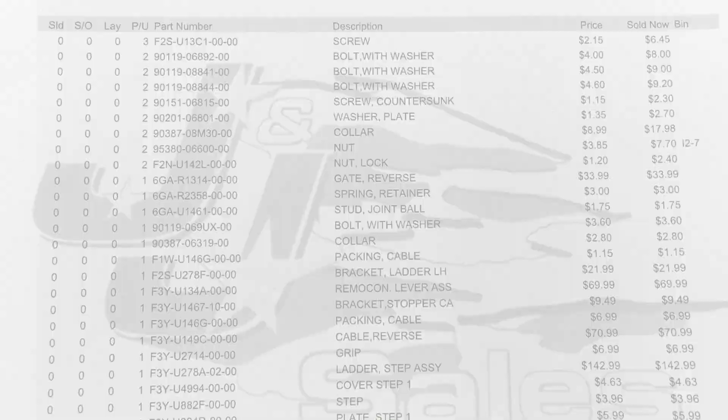Here's the list of parts I have here. There's also some parts to install the OEM rear step in this list, and those alone add up to almost $200. So you're looking at around $250 to $275 in reverse kit parts, depending on what your local dealer charges.

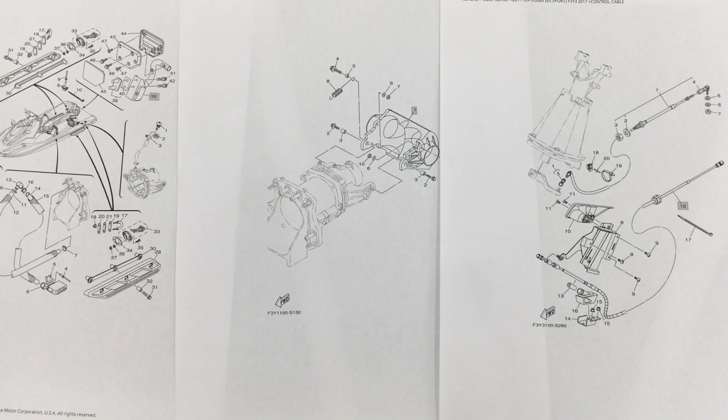The dealer also supplied these diagrams. I'll put a link for these in the description as well. This one's for the rear step. The two on the right are for reverse.

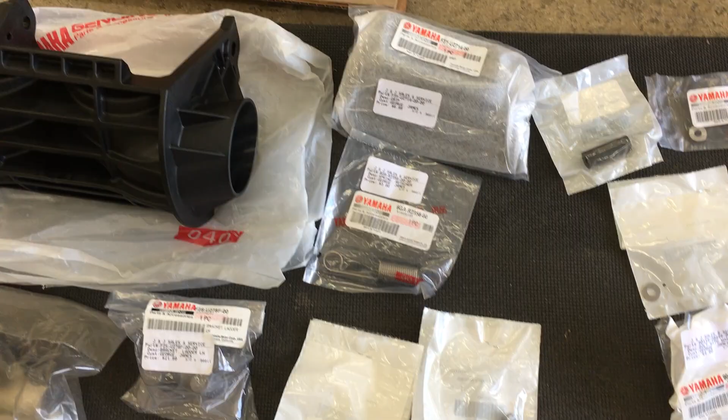Here's all the parts needed for the manual reverse installation. I'll go over each of these in detail as I put them on. A lot of little pieces and parts. There's the handle, the actual lever, bucket, and the cable.

Getting this sorted took a little while. The letter next to the part number says what diagram it's from. B for bucket, C for cable, and L for ladder, which we'll do in another video. Then the number beside the description corresponds to the number in the diagrams.

First I had to remove the seat, storage compartments, side panels, and the whole black plastic section on top of the hull to get better access to everything.

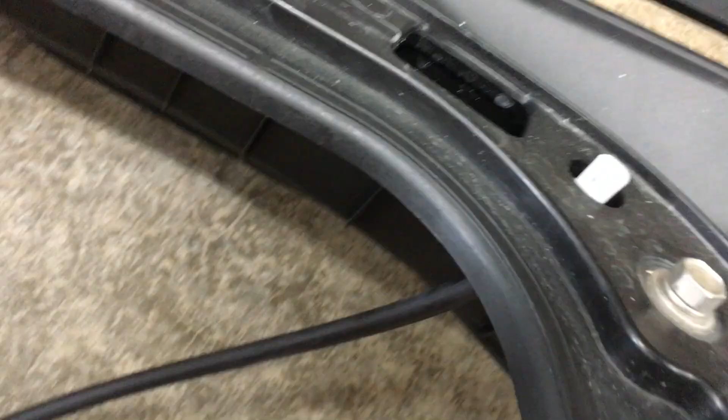On the black plastic top piece, there's this rubber hose just dangling around in the hull. This end was supposed to go down to the battery box. There's a diagram showing how it should go. I need to remove this bolt too.

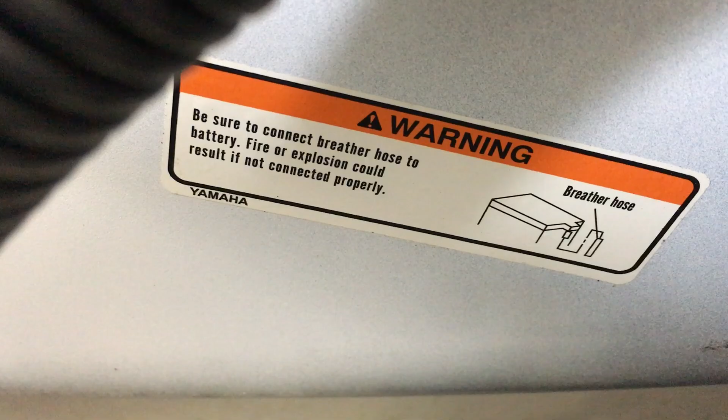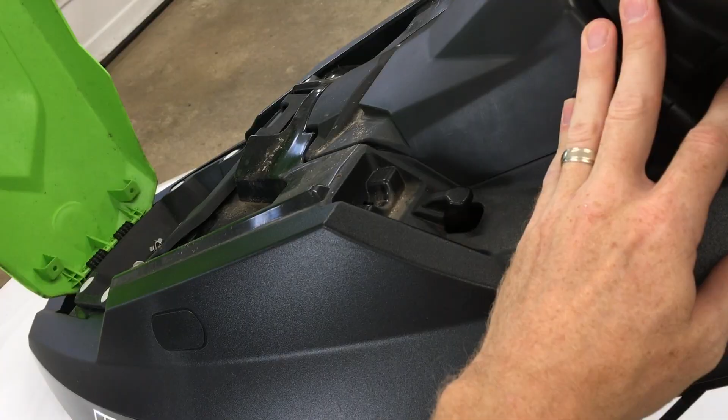This trim cover needs to come off, but if you just try to pry it straight up, there's a white plastic clip that's probably going to break. So I need to remove some more stuff to slide the entire cover up.

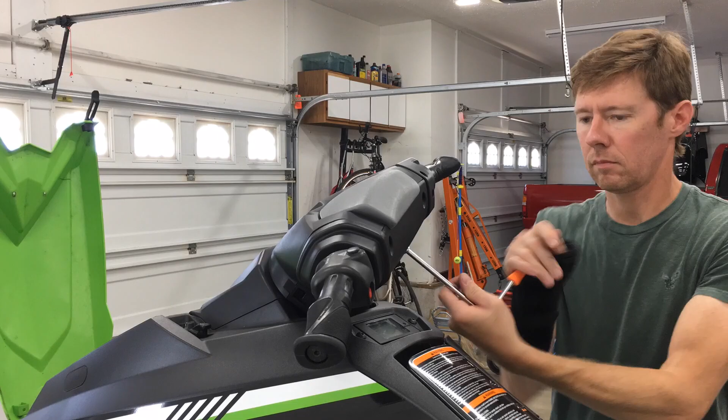Next I removed the Allen head bolts from the back of the handlebar cover. They were a combo of 4mm and 5mm. Now I can press in this clip and the top cover will pop right off.

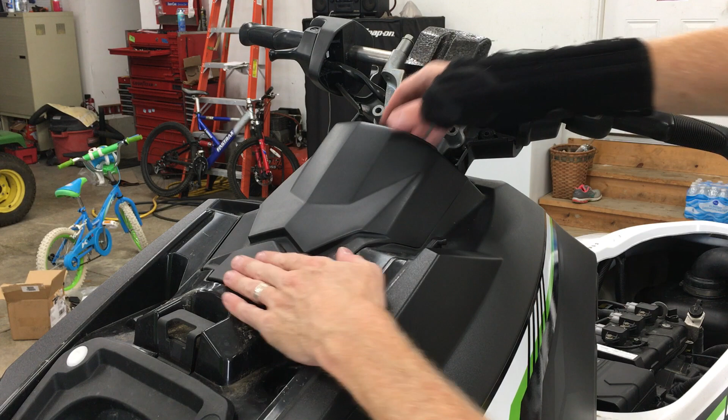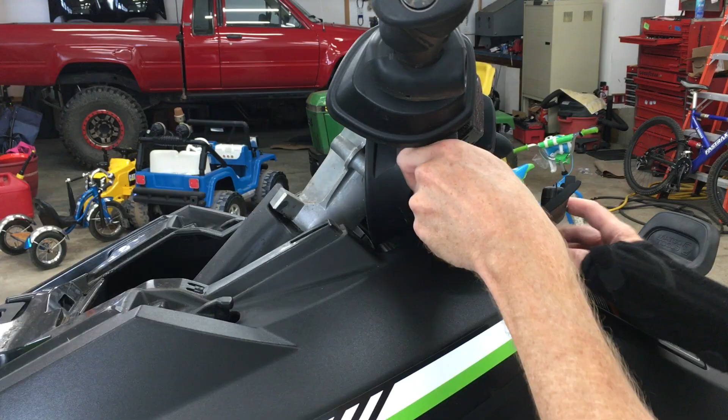With that out of the way, I can slide this trim cover up and it comes right off. It's held on with these two clips up here and that white plastic clip at the bottom. I can bend the lower bar cover a little to remove it.

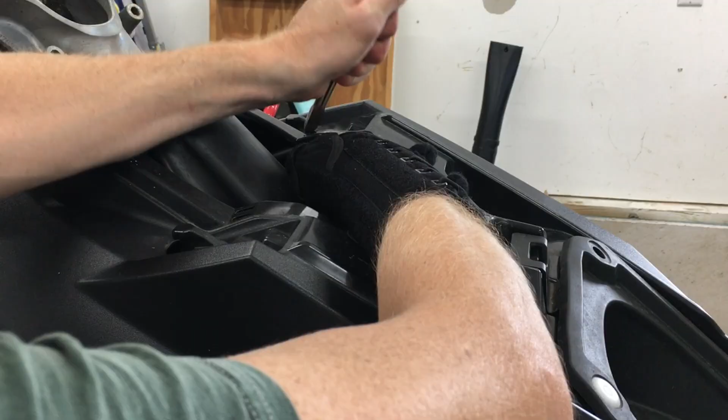Now this black cover can move. Everything I've done so far is just to get some room to move this black cover up. Now there's a wire harness keeping it down. I'll just cut the zip tie holding the wire for now.

Now grab something. A life jacket works great. And I'll use it to hold up the cover, and pull it out and away from the hull. Now I have room to work.

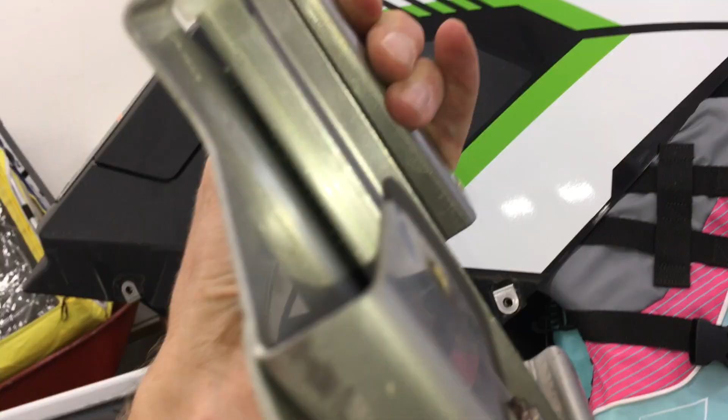Looking back in here, the holes for the metal lever bracket are already there. There's two, there's the third. Here's the metal bracket. 1, 2, and on the back, 3.

And these two holes at the top, they attach to the plastic handle, which will replace this block-off cover.

To remove that block-off plate, I have to unbolt these two Allen head screws from the bottom, and they're 4mm. I used a long extension on a 1/4-inch ratchet to get to the screws, and this is all it is.

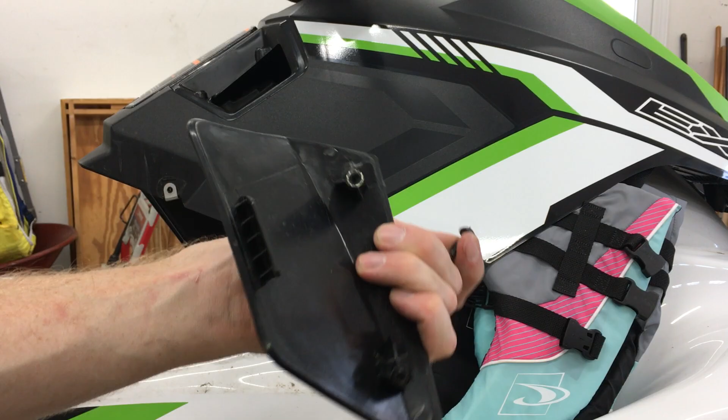Okay, just ran into an issue. These 3 number 9 screws are supposed to fit the metal bracket. There's the part number right at the top there. Here's that part. It's a screw, not a bolt. Not gonna work. These must be for the step.

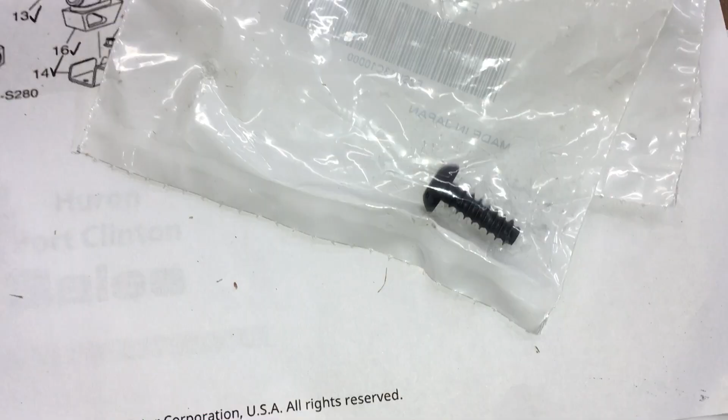I've got some of these metric M6 by 1.0 bolts. They're from one of my Toyotas, and they fit perfect.

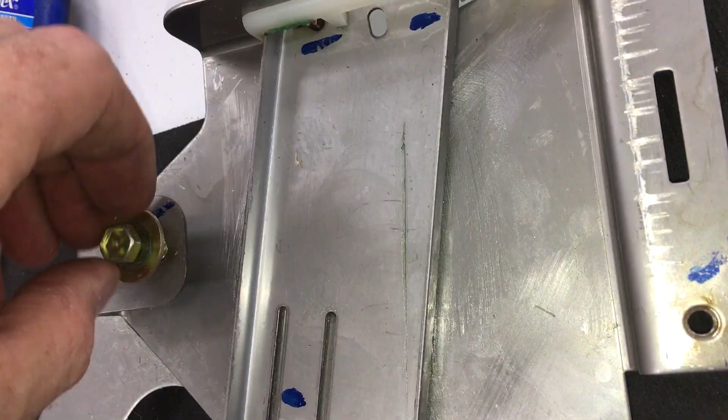Pop open the console here. Inside, you see one up there and 2, 3 holes down here. The metal bracket goes on this side, and the bolts screw in through the console side of the plastic. There we go. Nice zinc-coated Yamaha bolts on that side, bracket mounted on this side.

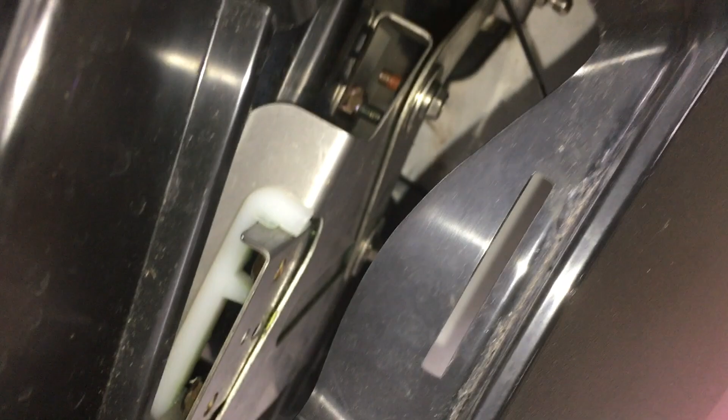Now it's time to drill the hull. It comes pre-marked from the factory. There, that's a little easier to see now. I only get one shot at this part. Don't want to mess up, you know.

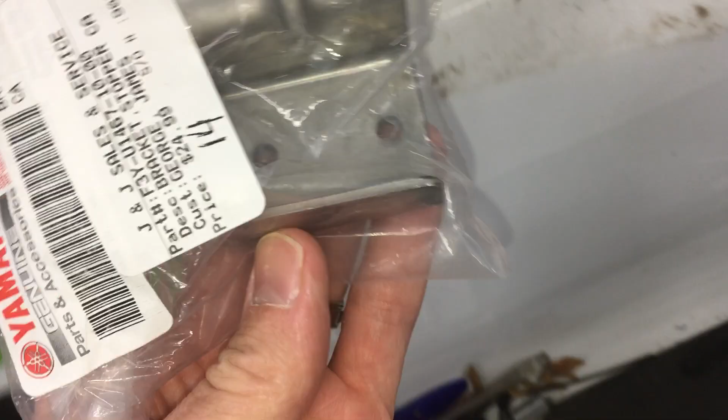This metal bracket mounts under the hull through these two small holes. And this rubber mount goes with it. It sits on the bracket and acts as a seal for the cable to pass through, right here.

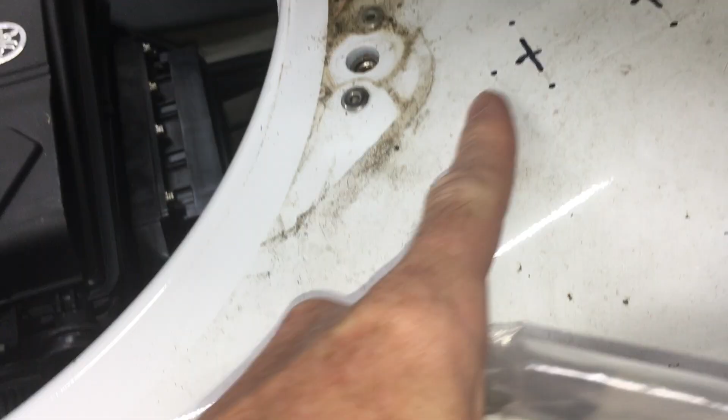Get a drill bit just slightly larger than the diameter of the studs. I've got just enough space for a drill in here. Just be sure to keep the drill perpendicular to the surface of the hull.

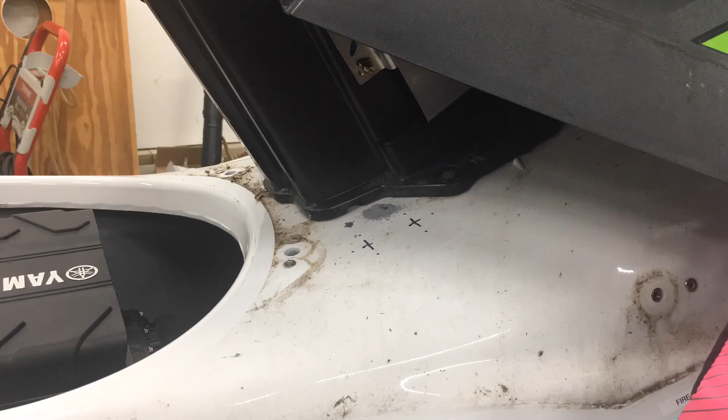Now I have my largest bit, 1 inch. And I'll use this to drill out the big oval-shaped hole.

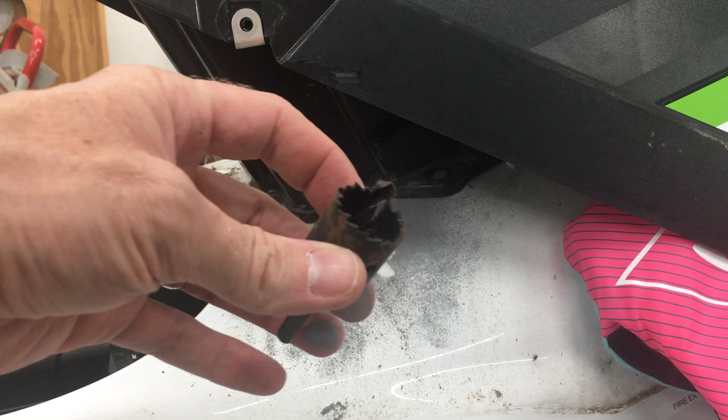This took a while, probably because my bit was pretty dull. Be sure not to breathe in this dust. I'm going to try a hole saw to speed this up. Oh yeah, much faster. Then I drilled a second hole for the front of the oval.

Dremel time. Be sure to wear a mask so you don't breathe this fiberglass dust.

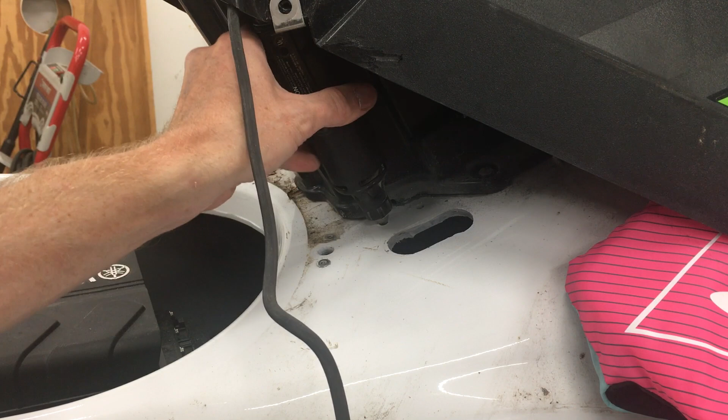The holes were a little tight, so I used the Dremel again to enlarge them. Time for a test fit. That's better. Now, let's try it with the rubber mount. Not quite enough on the oval. You can see where there's dust on the rubber. That's where I need to cut more.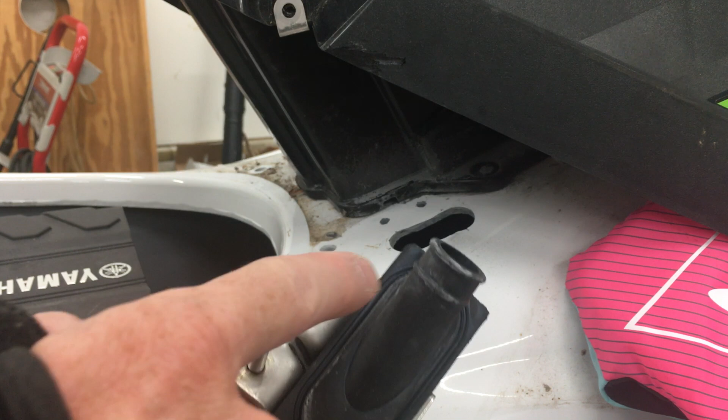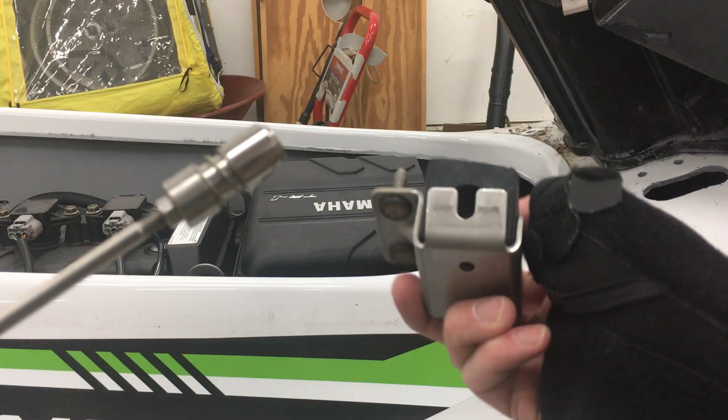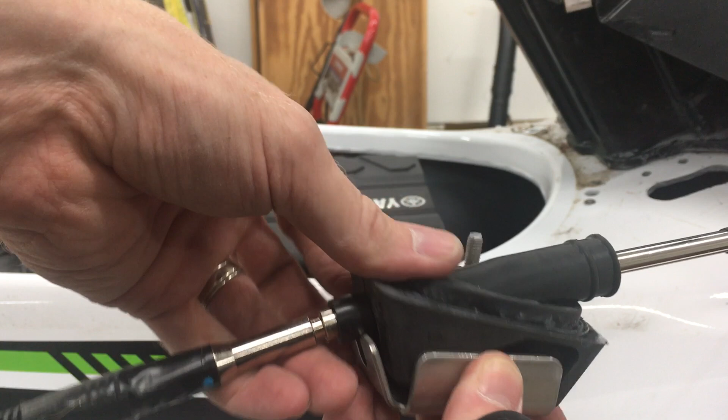It's tight, but it fits. This bracket uses these two lock nuts, but I can't install it just yet. The cable has to go in first. Grab this rubber sleeve, and that fits between the cable and the rubber mount. Then it all goes together like this. And the cable has a groove that fits right in the notch.

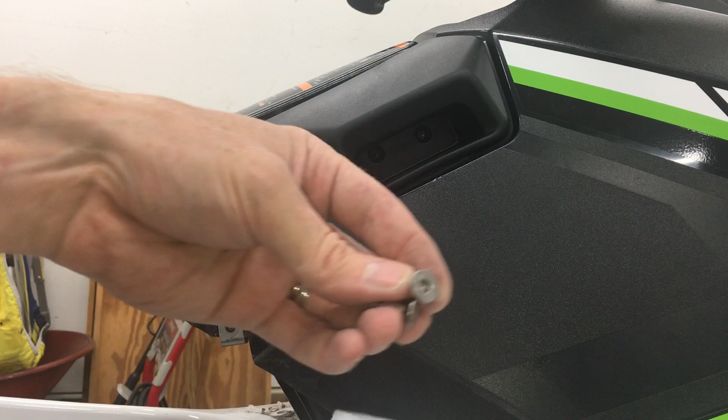Before I tighten these lock nuts down, I'm making sure the rubber mount is all the way seated. Now I can set this cover back down, and this is how the handle fits on. It attaches with these two 4mm Allen head bolts. They have some thread lock pre-applied. Also, note the beveled edge so they sit flush.

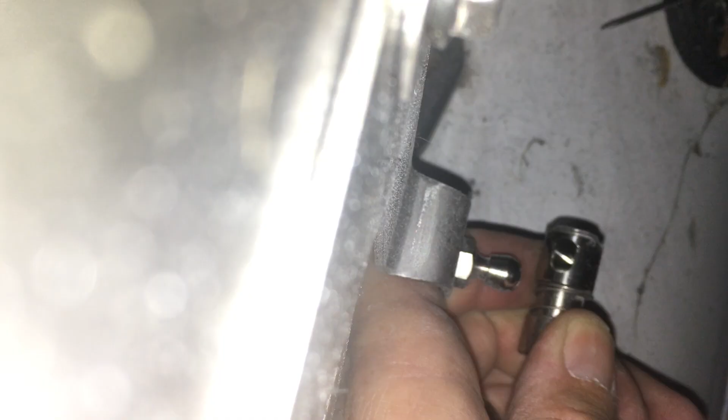Now I'm lifting the handle, and the pivot point for the cable is moving down to the cable. Now I can slide the collar back on the cable. Oh wait, before I connect the cable, I'm getting a little grease to put in the hole. Now, connect the cable to the pivot point, and done. Do a quick test.

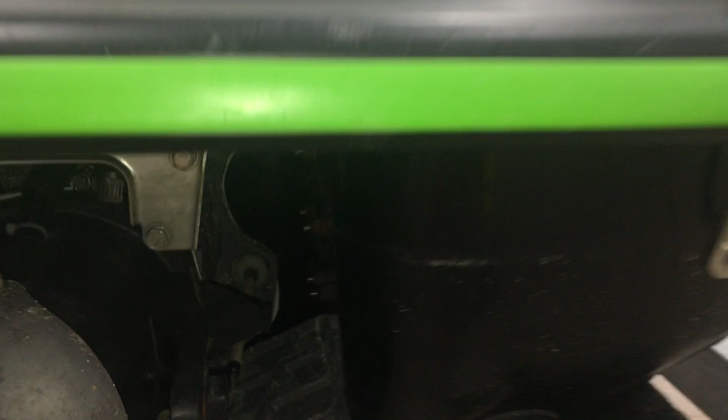And we're good. Now I'm at the back of the ski, and you can see a raised mark on the surface, right there. I need to drill that out. This is my only drill bit that's long enough to reach, so I'll start with this and then enlarge it with the Dremel like I did on the other holes.

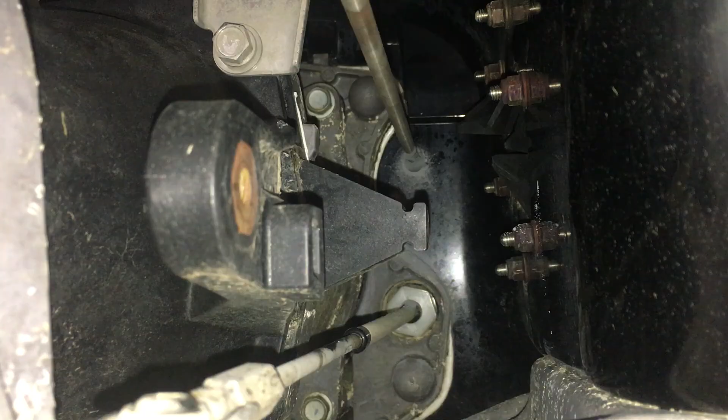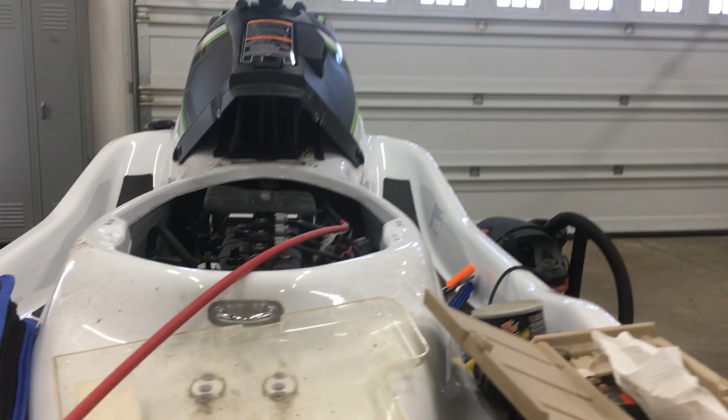That was dusty. The hole is ready for the cable. However, this isn't going to fit through, only the threaded part will fit. I got a little ahead of myself hooking up the cable. So I need to detach the cable up to the lever, run it back through here again, and take it all the way out. And then fish it through from the back.

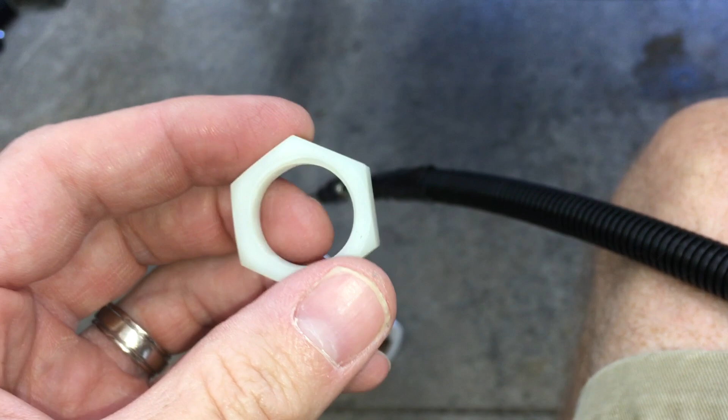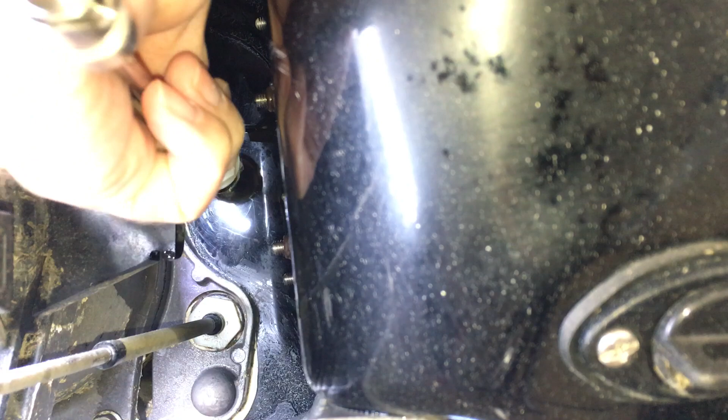Before I put the cable back through, there's a little rubber gasket that has to go on. And then this plastic nut will go on the inside of the hull around the cable. So here goes the front end of the cable. Now I'll go around and pull it through. Oops, almost took out the camera there. And then the threaded plastic fitting stops at the hole. And then this plastic nut.

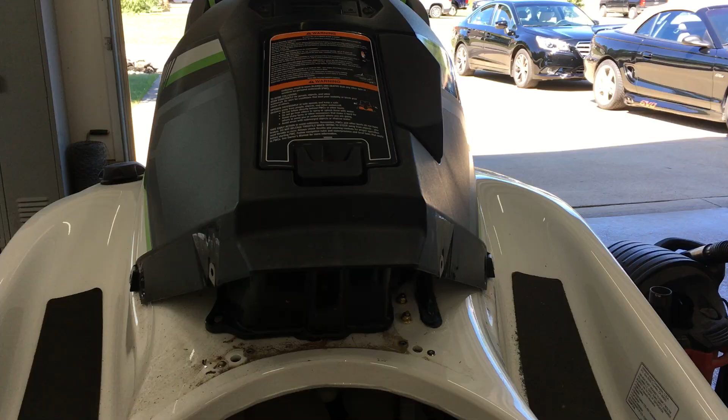Now I can install this again in the hole I cut. Then put the lock nuts on for the last time. And don't forget the rubber sleeve too. Alright, the cable is all installed, running along the right side here, along the bottom, and out the back.

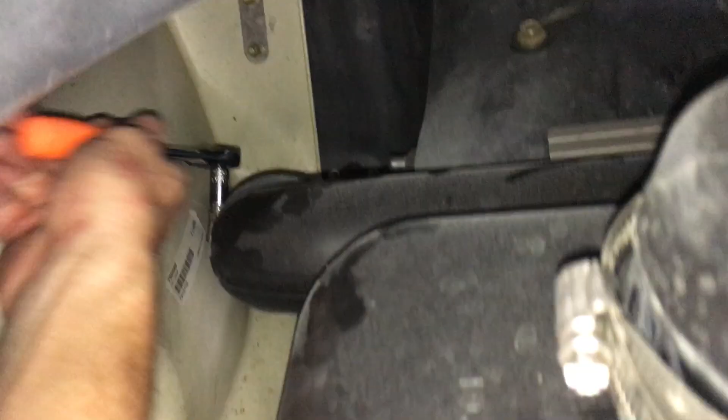In the hull, I need to remove this clamp, and this one back here. And I can get this box out of the way to give me some more room to work back in here. There's the cable and plastic nut. You can see all the fiberglass dust on the inside.

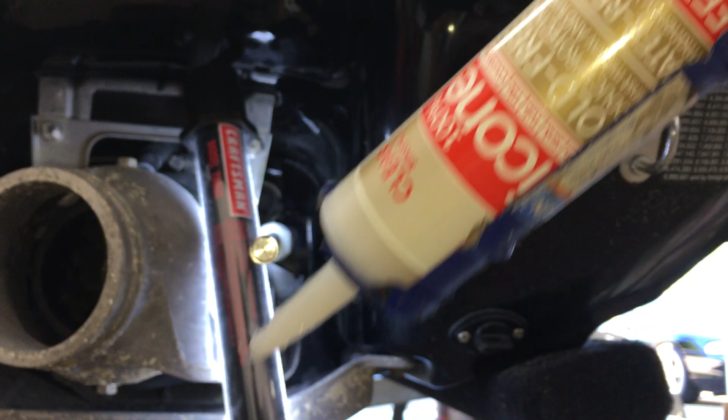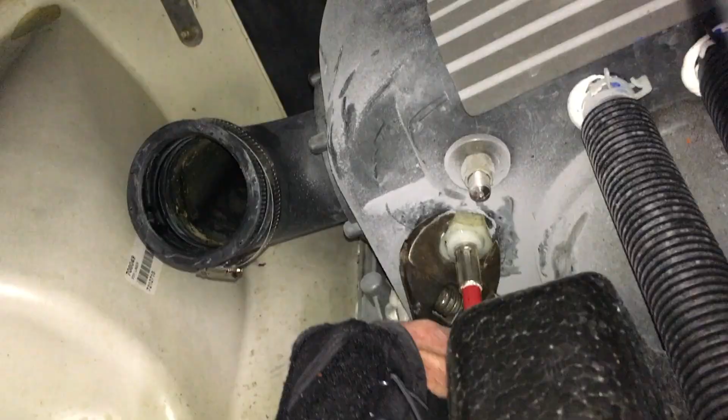Before I tighten the plastic nut down, I'm going to put a little silicone around the hole just for some extra insurance to make it waterproof. Then push the plastic threaded part through. Now just tighten the nut from the inside. If you don't have anybody to hold the nut on the outside while you turn it on the inside, vice grips help. It's kind of cramped, but it'll get there. Just don't over tighten and damage the plastic threads.

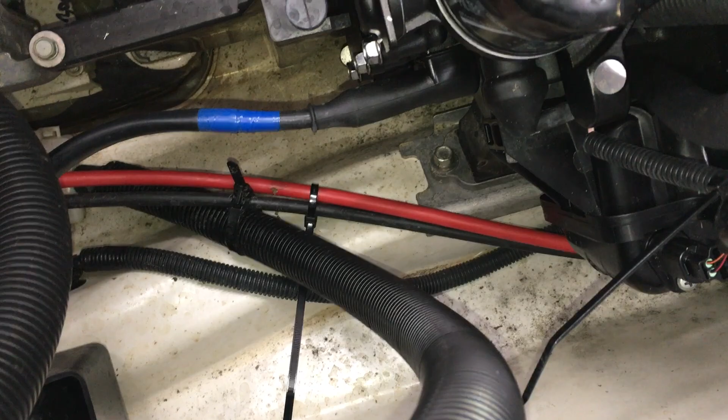All done. Nice and snug. So I just zip tie the cable here and here, just so it's not flopping around. Now I can put the box back in. Tight fit, but it's in.

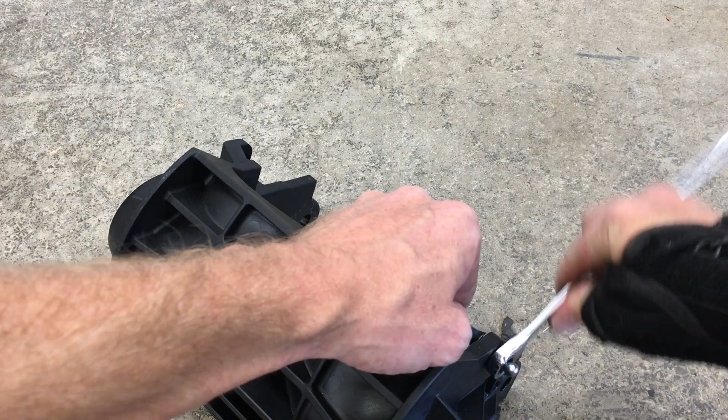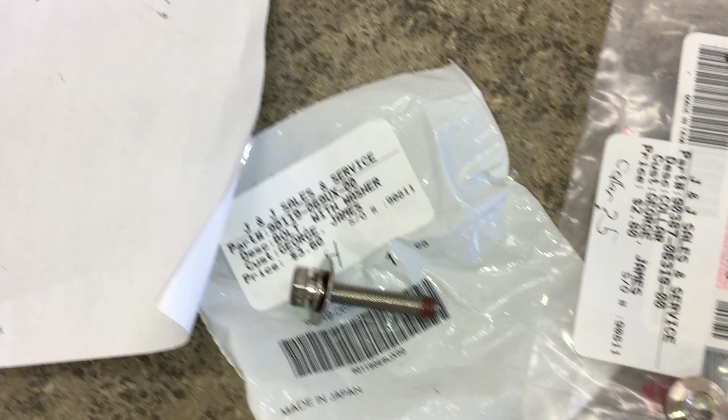All right, time to install the bucket. This is where the cable attaches, and I have that piece here, and the washer. That pivot hardware where the cable attaches just goes right on like that. So up here we have a bolt and washer, collar, and a spring. And here's the bolt with the washer and lock washer, collar, and spring. And those go on like this.

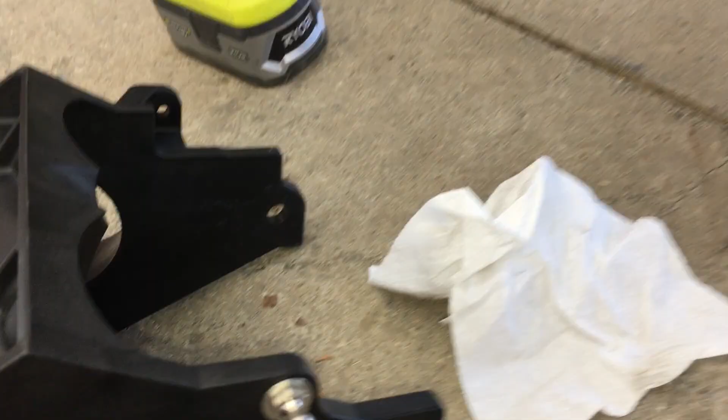Now I'm on 2 and 3 here. These 12mm bolts are 2. This spacer collar is 3. And they go in the big holes and into here and here. And those will let the bucket pivot up and down when I pull the cable.

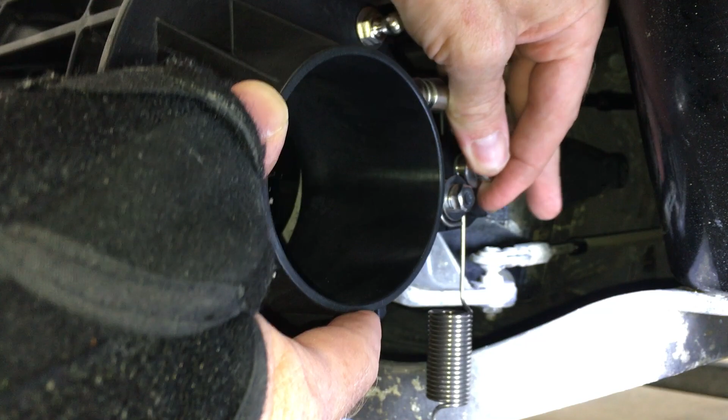So I've got the bucket in place. The collar fits right in here. Then I'll get the bolt started by hand. Nice and snug with a ratchet. The back end of the cable attaches to the pivot point the same way the front did.

Put a little bit of grease in this one too. Just slide the outside back. It's spring loaded, much easier to do with 2 hands. And on it goes. Then this spring, vice grips seem to make this easier. Look at that, right on.

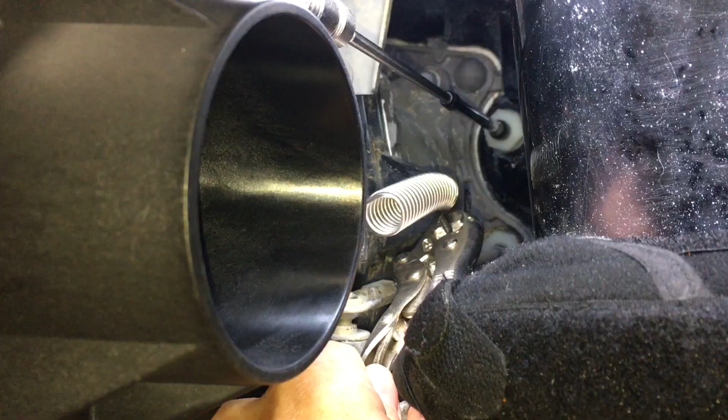Test time. Right now the bucket's down in reverse mode. Up, down, up, perfect. Now everything on the hull just needs to be reassembled the same way it came apart, and the job is complete.

I also have a rear step to install on this Yamaha, so I'll do that in another video.